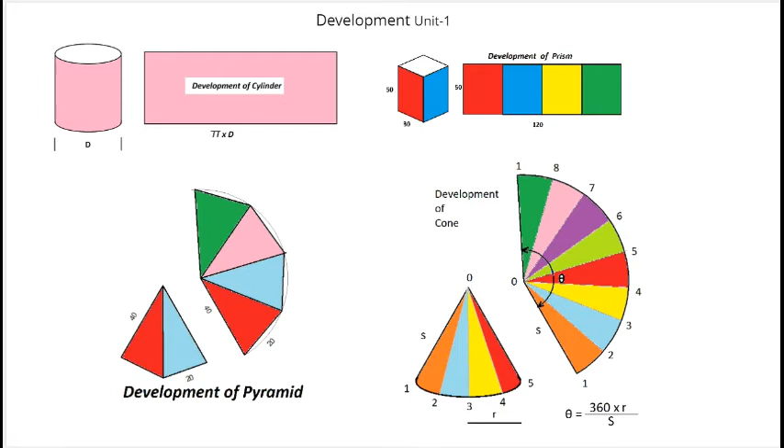Now we are going to discuss one by one the method of drawing the development of these type of solids. For that we shall solve the problems in which the development will be asked to be drawn. So let us take one problem. This is the problem where it says that draw the development of lateral surface of a pentagonal prism with edge of base 40 mm and height of axis 90 mm.

So this is a pentagonal prism and the size is given. It is kept on HP on its base. So if it is kept on HP on its base, its axis will be vertical with an edge of the base parallel to the VP. So let us try to visualize this thing. When it is cut by an AIP inclined at 30 degrees to HP. AIP means auxiliary inclined plane. So this solid is not complete, it is cut. So let us try to see these things.

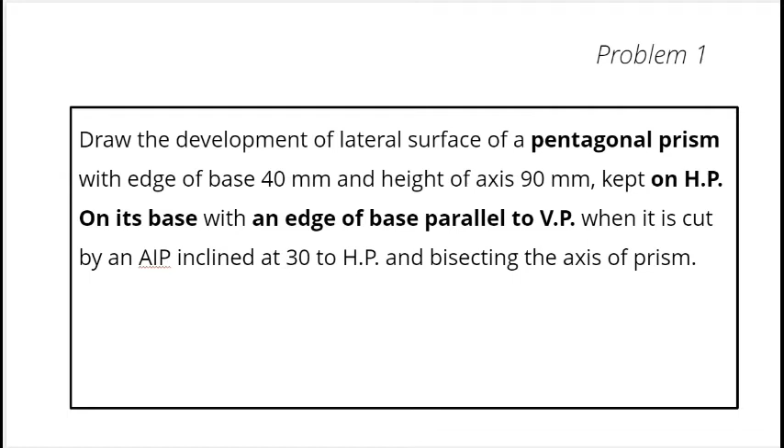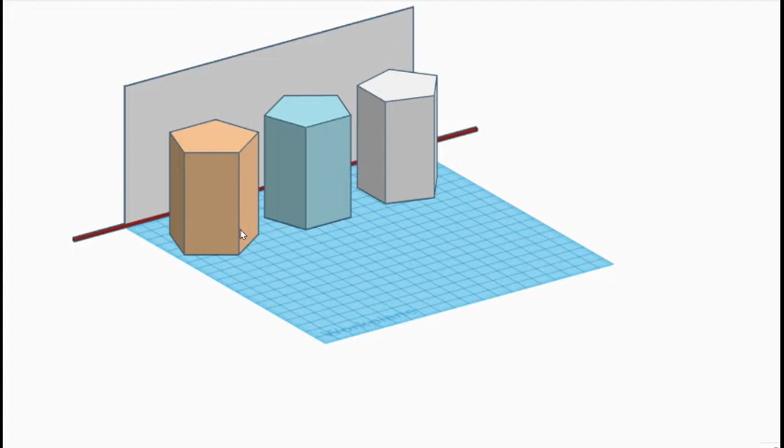Here you can see the model of first quadrant. So this is the horizontal plane and this is the vertical plane, and the intersection of these two is the XY line. So here you can see the XY line. On this horizontal plane, three pentagonal prisms are put. So if you see it from front, then you will find that they are resting on base on HP. All are resting on base on HP. So why these three I have drawn?

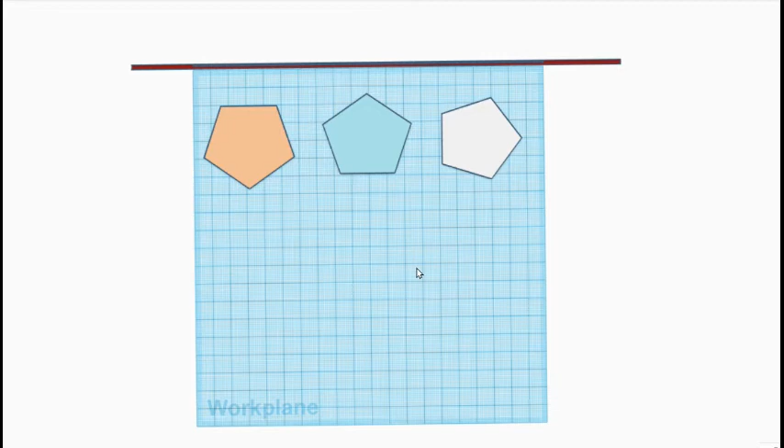So let us try to see this thing in top view. If you tilt this thing and see this thing in top view, then the top view of all three are different. So in this first case, this base edge or a face is parallel to this vertical plane. Note that this vertical plane looks like a straight line when you are looking at the top view. So as long as you are looking at the top view, you can fairly say that this XY line is nothing but VP. And the other way, if you are looking at it from the front, that is, as long as you are looking at the front view, this XY line works as if it is a HP. So here these are resting on XY line, that means they are resting on HP.

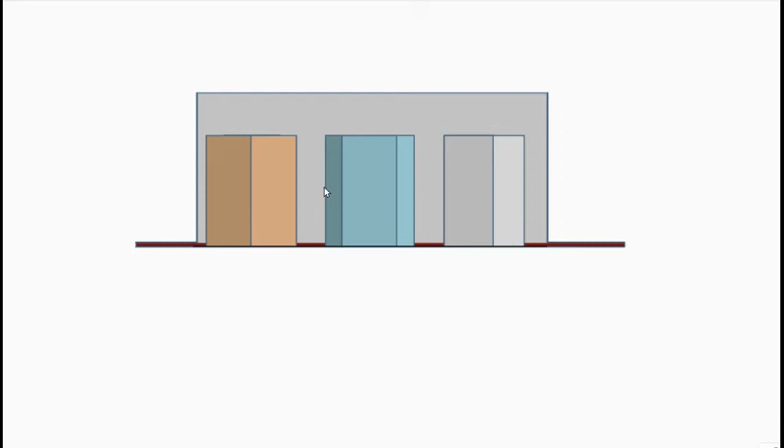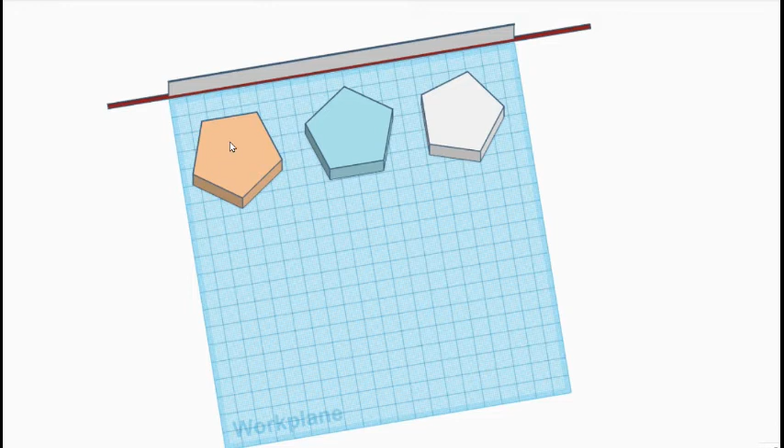Now if you go back to the top view, you will see that here in this case, this edge or back face or rear face is parallel to this vertical plane. So you can tilt it and get the idea of this thing. So this face, this rear face is parallel to the VP. Okay, so this is the case we want. Okay, then this is another case in which this pentagonal prism is kept such that this face is parallel to VP. So here also one of the base edge is parallel to VP.

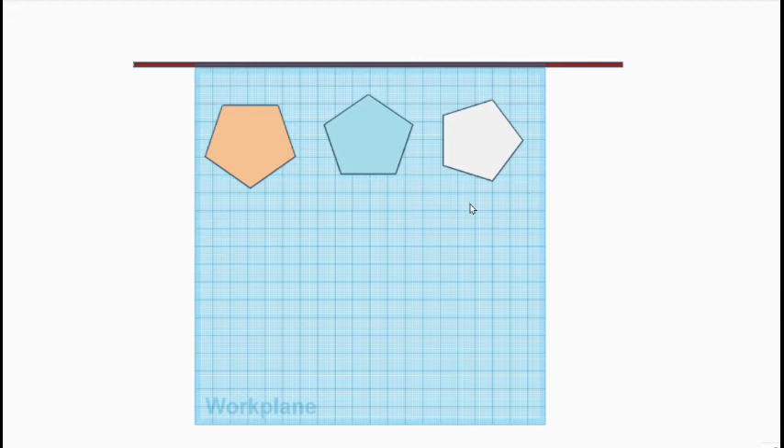But in this case of white prism, you can see that no base edge is parallel to VP. So this is not the case. So you cannot draw the problem by drawing the top view in this fashion for this problem. If there is a problem in which it is mentioned that one of the base edge is perpendicular to VP, then this can be used. But for this problem, we can use any of these two positions.

So in top view, first we are going to draw the pentagon like this or like this, whichever way you like it. It is easier to draw this type of pentagonal prism because first we will be drawing this line, then you will be taking 108 degrees angle, then you will be marking the arcs, and this point where it will end you don't know. Whereas if you start with this thing, it may happen that it will touch the VP. So it is better to do this thing, but this is also okay. This is also right.

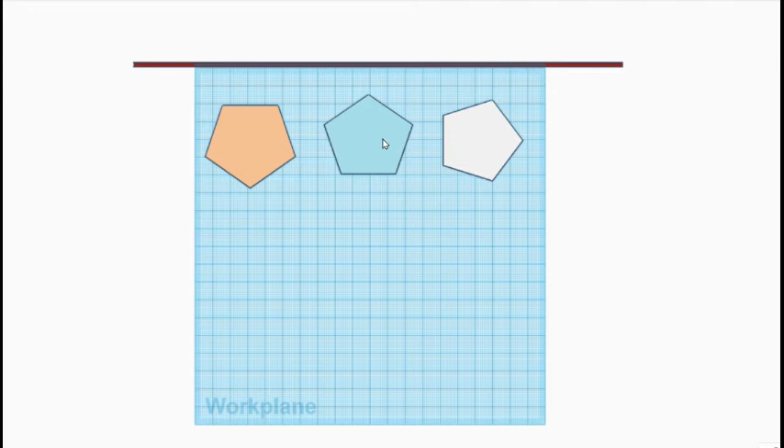Now let us actually start drawing the figure. This is the XY line. Above this thing, we are going to draw the front view. And as we talked about, when we are looking at the front view, this line itself behaves as if it is a HP. So if some line is parallel to HP, we shall be drawing it like this in the front view.

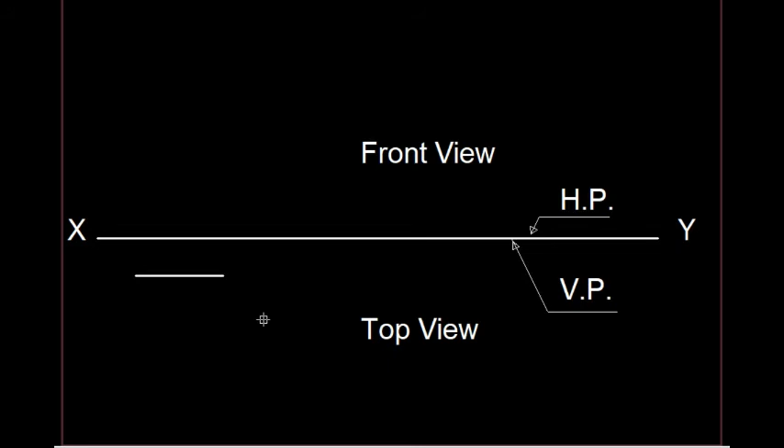Then as long as you are looking at the top view below XY line, this line itself works as if it is a vertical plane. If some line is parallel to VP, we shall be drawing in the top view like this. So somewhere here, let us draw the pentagon in top view. This angle we are going to take 108 degrees.

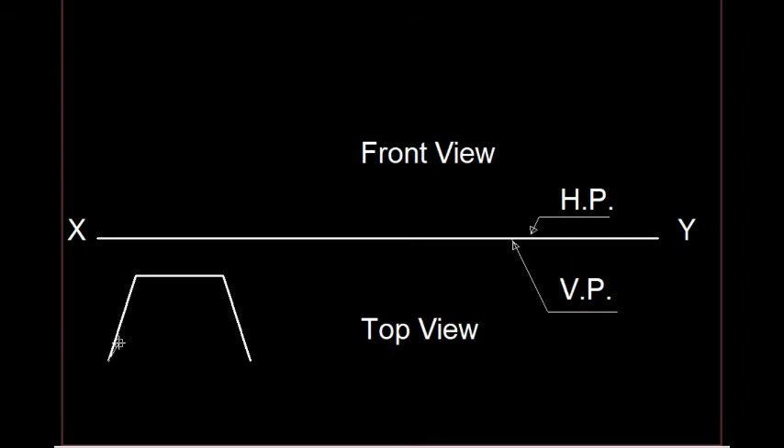Similarly, at this angle again we are going to draw a line of 40 length with 108 degrees angle.

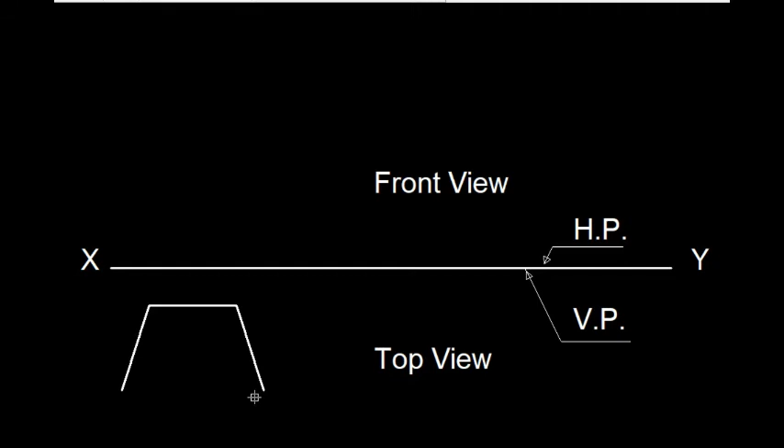Now to complete the pentagon, let us draw two arcs of 40 radius from these 2 points like this in this direction, and let us join this point of intersection with these 2 points so that we shall complete the top view of the pentagonal prism. So this way the pentagon we have drawn.

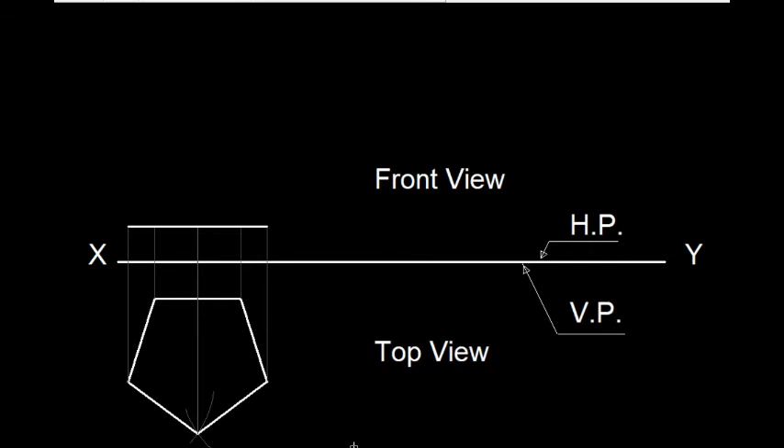Now let us draw the front view of this pentagonal prism. By taking the projections from the top view, we have drawn here the front view. And in this we have drawn these two lines as hidden lines and these three lines as continuous lines. Why is that so? That is, why are these two lines hidden and why are these three lines continuous? Let us try to see or visualize it.

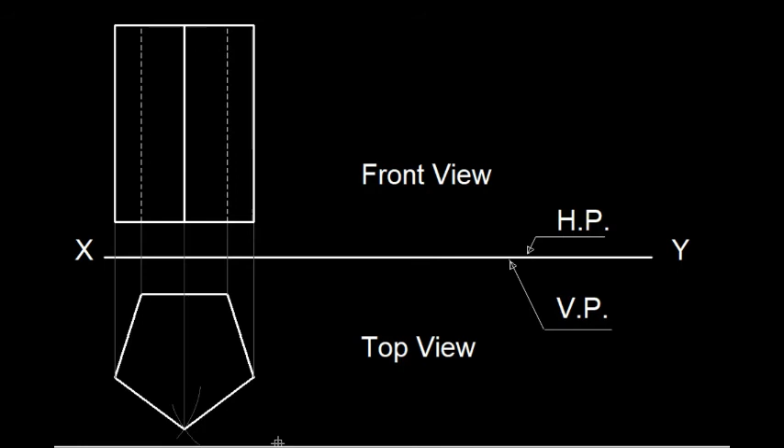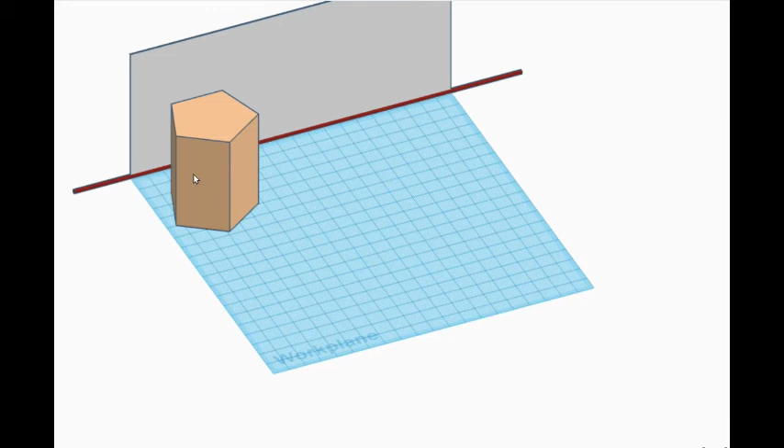Coming back to our model, this is the pentagonal prism. It is kept with its base on HP and such that one of the base edges is parallel to the VP, as we have seen. When you are looking at it from the front, from this side, this edge is nearer to you, so it will be visible. These lines will also be visible, whereas the rear lines, these two lines, this line and this one, will not be visible. That is why we have drawn those two lines as hidden lines.

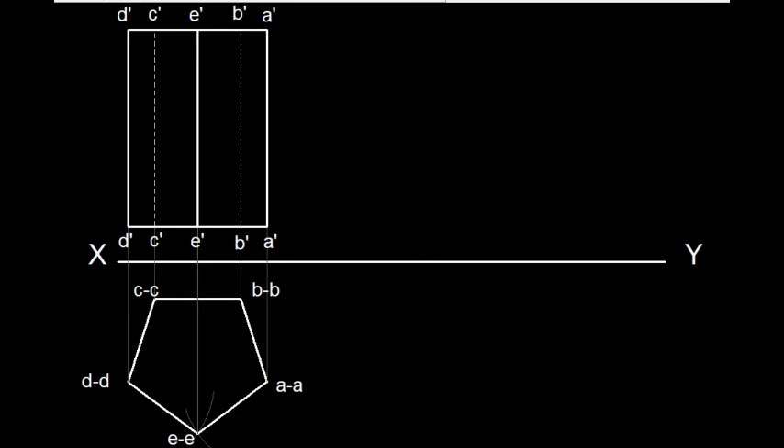So after drawing this front view and top view, let us try to draw the development of this prism. We want to develop the lateral surface, and as we talked about in the previous lectures, the length of this development will be equal to 5 times the length of the side. That is, the length will be 40 into 5, that is 200 millimeter. So let us draw it. To start with, I will draw one line like this. So this line is of 200 millimeter length.

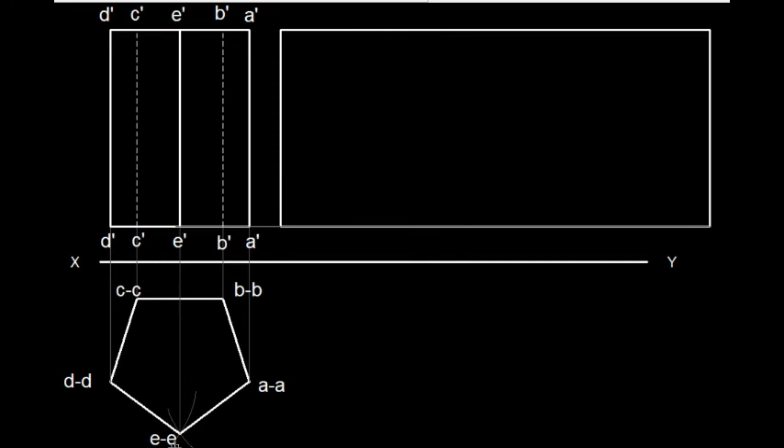Now I will draw a vertical line like this. So this is the complete development. This will be of 200 length, and the height will be equal to 90 as given in the problem. The developed surface will be 200 by 90.

We'll have to wrap this development around the object. To do this, we'll have to divide it into the number of faces, so that along those edges we will fold it so that it completely winds around the object. So this AA edge is going to be attached here. Then we shall be drawing the other edges B, B, C, C, like that. Now I'll draw these edges. This way the edges are marked.

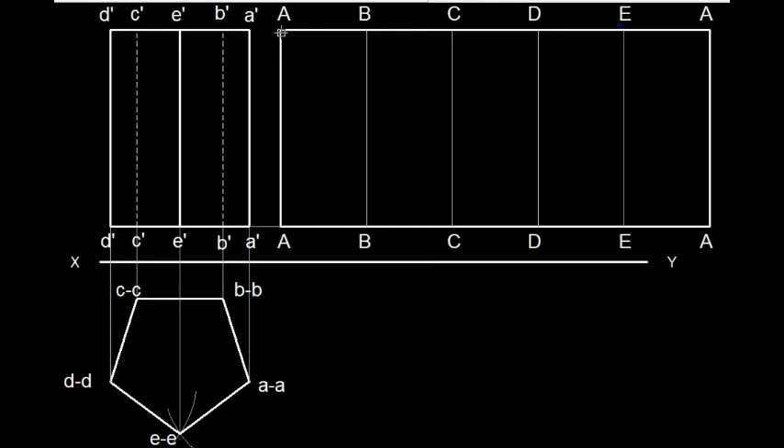Now if we cut this development and fold it along these edges and match this with the A edge, then B with B edge, C with C edge, like that, then it will be completely wound around and the other edge will come back again to AA. That is why this AA name is appearing twice here. So this is the development of a complete prism.

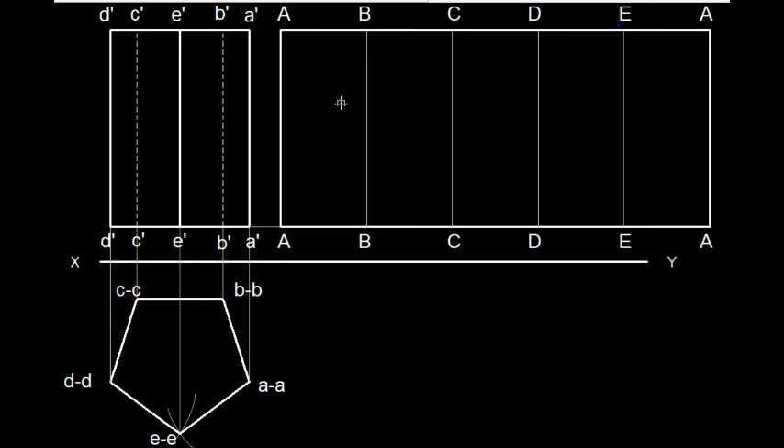But as we have seen in the problem, it is mentioned that this prism is to be cut bisecting the axis, and the cutting plane or auxiliary inclined plane should be inclined at 30 degrees to the HP. So the inclined plane can be drawn this way. Okay, so let us draw the cutting plane and see what changes there will be in this development.

The auxiliary inclined plane is shown inclined at 30 degrees to HP and bisecting this axis. That is why we have drawn this line. This yellow line shows the cutting plane. The lower portion is to be kept and the upper portion is to be removed.

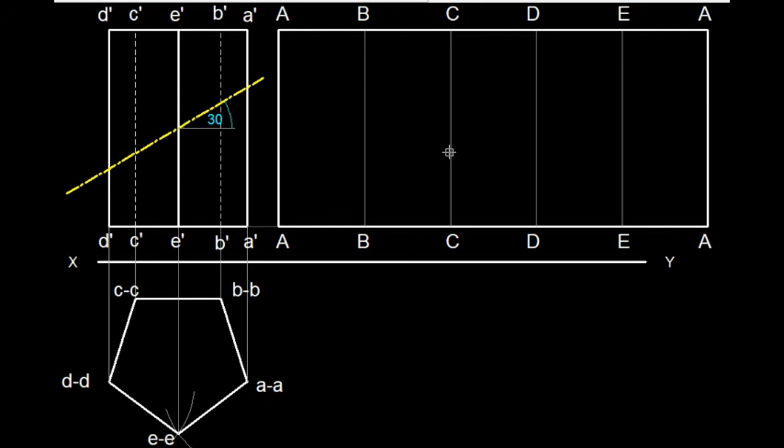Now if you see this point, let us call this point 1. This point is on edge AA. That should be marked here and here also, because these two are the AA edges. Now if this point is point number 2, then it should be marked here on this edge B. Likewise this point is 3, then it should be marked here on the line C. So I'll mark these points.

So here we have marked these points: 1 on AA, 2 is on edge BB, so we have marked it on BB by taking projection. Then 3 is on CC, which we have marked on this edge CC. Then 4 is on DD, so we have marked it on DD in the development. Then 5 is on EE, so we have marked it on the corresponding EE. Now let us join these points. These points are to be joined by straight lines.

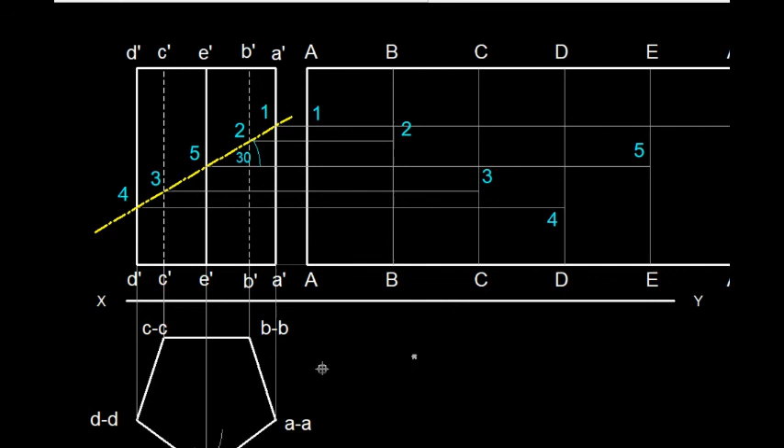If it is a cylinder, then we have to join them by a smooth curve. Otherwise, if it is a prism or pyramid, and if it is cut by a straight line, then we join it by straight lines. If it is a cylinder or cone, then we join them by a smooth curve. Only if the cutting plane itself is curved, or it is cut in a curved fashion, do we have to join them by a curve. In this problem we will have to join it by straight lines. So let us join these. So this way these points are joined by straight lines, as we have discussed.

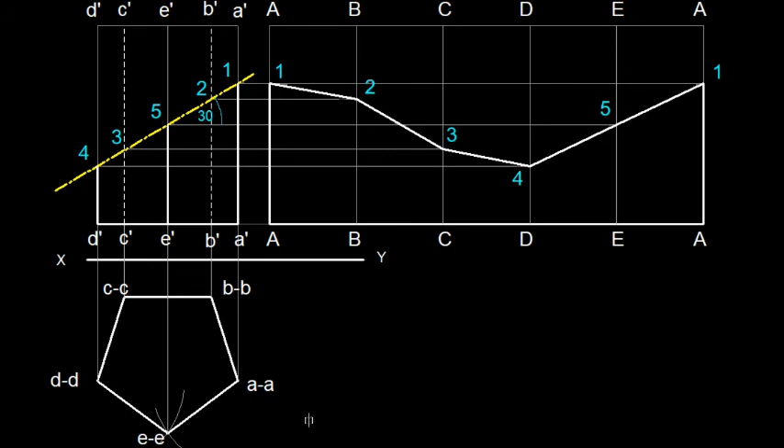Then the upper portion of this development, as well as of the front view of the prism, is made faint, because this portion is cut. That is why it is made faint, and the lower portion is now the final development of the cut prism. So I would ask you to take a drafter or sketchbook and ruler and draw this once or twice. Let us see different kinds of problems in the next lectures.